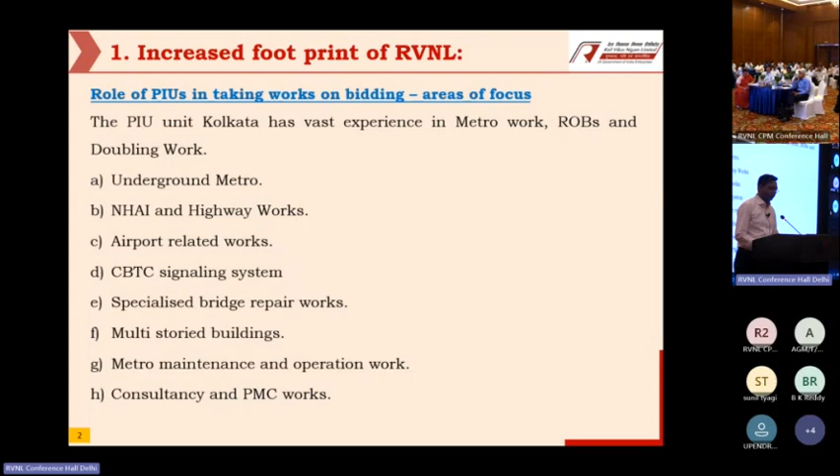Where we are right and where wrong, I'll deal with the subject through four projects that we started in the last one year. We started the Kona Expressway this financial year, where we are a contractor to NHAI. It's an EPC contract taken via very aggressive bidding. We got this project at 720 crores against 840 crores, and we have 2.5 years. I've covered it separately, so I'll skip this part right now. It's a very challenging beginning indeed.

Then from the Airport Authority of India, we got work worth 230 crores on nomination basis. It's very nice for RVNL because we'll be learning from the airport field and we're also getting a good margin here.

Similarly, for KOPT also, we have got this Bascule Bridge rehabilitation work, again on nomination basis. We have got a 100 crore rupee work, and once we complete it, it will be a very nice added potential, because very few players will have this kind of expertise in repairing a Bascule Bridge. And again, being on nomination basis, we get a good profit margin.

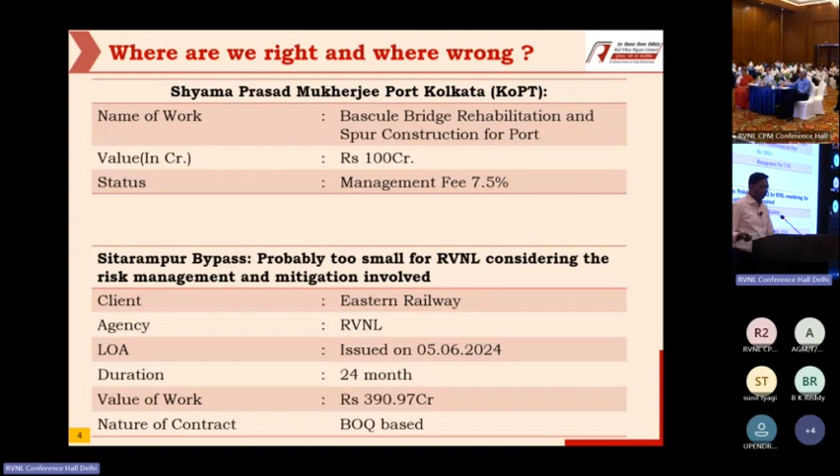Should RVNL not be a marquee organization then? Yes, it should be market facing.

It's a 720 crore work we started, but without deploying any additional manpower. Then we started the Sitarampur bypass, again without deploying any additional manpower. Then we started Kalipahari Pradhankunta, again without additional manpower. All the works we completed in the metro over the last year have been handed over to Metro Railway Kolkata, and that manpower has been redeployed to these works.

The best tool to perform, as we are changing our role from a client to a contractor, is that we need to be strong in legal and arbitration matters. That's why in the PIU we have established a legal and arbitration cell, because Kolkata itself is a very difficult place to work due to various litigations, which I'll explain in the underground section. If we don't have a dedicated legal and arbitration cell, many of our letters and legal matters may be left unreplied, which would have huge ramifications for us.

We intend to have a build, drawing and design cell also, because in Kona, since we are EPC contractors, design is our own scope. No matter what we outsource, we need to analyze or compare two designs, as I'll be discussing regarding Kona. So we need in-house designs and good designers who can help us bring this in. We have also established a planning cell.

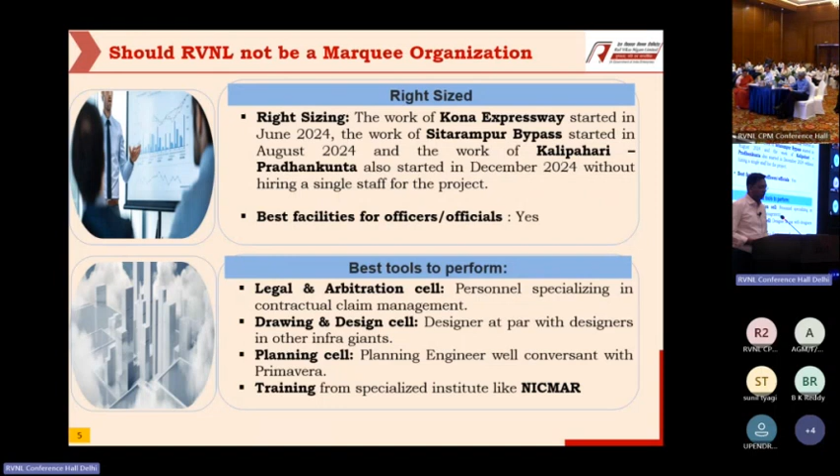We have hired a planning engineer who is an expert in Primavera, and we are using it. I'll show in Kona that we have been able to achieve something in Primavera because we are able to engage a planning approach. We should also go for training of our engineers from specialized institutes, from NICMAR.

This I'll skip because it's already in the Google sheet.

This is the data from my organization over the last 5 years. There were about 3 to 4 CPM. Units have also shrunk, and manpower has also decreased in the last 5 years. I think this is more important: the turnover in these 5 years has risen from 920 crores to 2700 crores. Our expenditure for PIU Kolkata is 2700 crores this year. So the turnover per employee is on a rising trend, which is healthy for the organization.

I'll skip this part, which is in the Google sheet. These case studies are good innovative works, but they are related to the underground, which I'll be covering separately.

The last one is we are doing this elevated metro, and in Kolkata getting a traffic block is very challenging given the political conditions. There are articles in Times of India about our Chingri Ghata problem, where the launcher is stuck just because we need to cross the road. We have made the diversion road, but there is no word from the state government as to when we will get the traffic block, so we are doing other works.

So whenever we are planning at the design stage, we try to think about how we can minimize our dependency on the state government and on traffic police. Normally we were doing the concourse by cast in situ. Till now we were getting the blocks, but considering the problems ahead, we have made a different design with TCPL, the Tandon Consultants, where the concourse would be done using precast beams and sacrificial shuttering, and the concourse can be cast there. This will reduce the amount of traffic block required and our dependency on the state government.

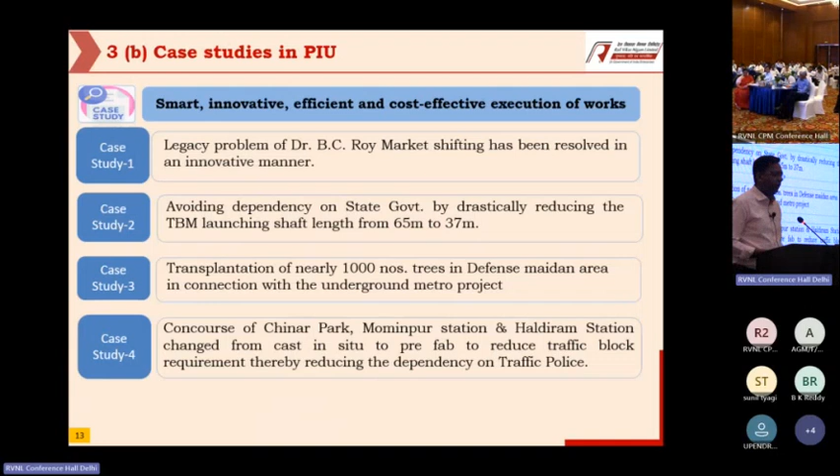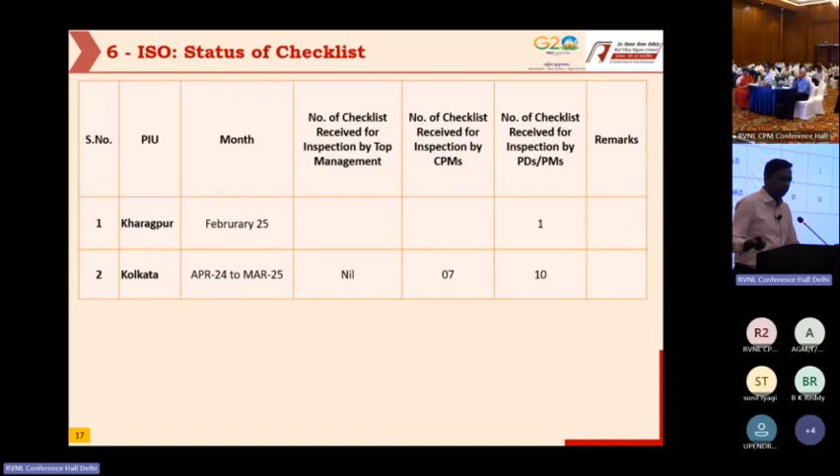These are there in the Google sheet. The ISO checklist is okay, we have done a lot of inspections. We are ISO certified on all three ISOs - 9001, 14001, 45001 - till 26.

One good initiative was that we cleared 242 crores of advances last year. Many of the advances that are appearing are frozen because those works have not been completed, and as the works get completed, we'll get those advances also.

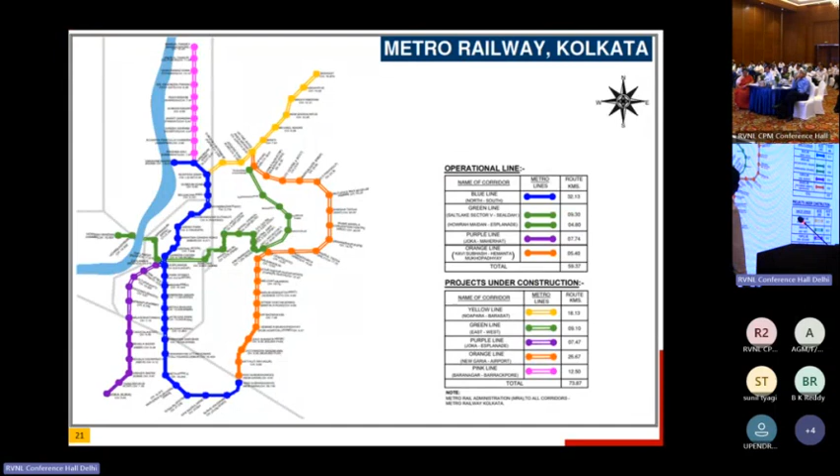So now I move to the main topic today, which is the challenges in the underground metro and Kona Expressway. First, I'll be dealing with the underground metro. We are doing the purple line here. This is the area that we are covering now with the underground, from Joka to Majerhat, which has already been commissioned.

This shows that from Joka to Majerhat, we have already commissioned in 2 phases, and both of them have been inaugurated by the Honorable Prime Minister of India. Phase 3 is in progress, and we expect to complete it by December 28.

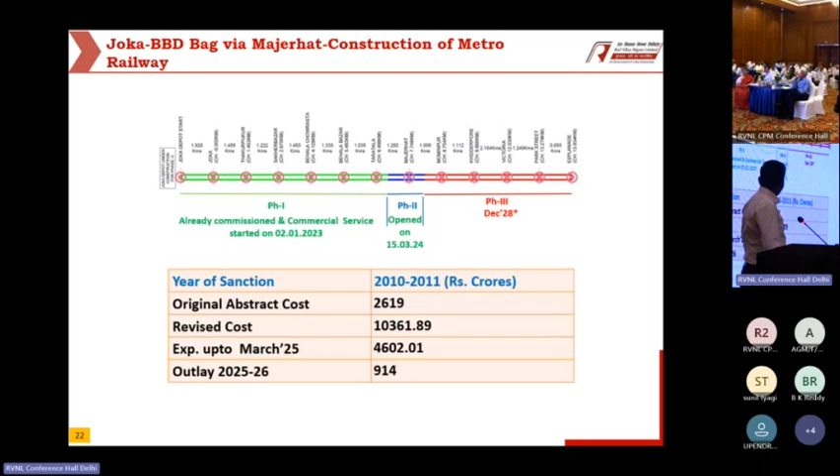In the underground, it's a 5-kilometer section. Our main contractor is L&T, and we have Yuksel Proje Humus JV as our general consultant. It's a 2,500 crore package started in 2023. The end date is 27 for the civil engineering work, so overall we are expecting to complete by 28.

The main scope of the work is to have 4 underground stations, namely Khidirpur, Victoria, Park Street, and Esplanade, and twin tunnels for the metro, about 2.6 into 2 - that's 5.3 kilometers of tunneling involved here.

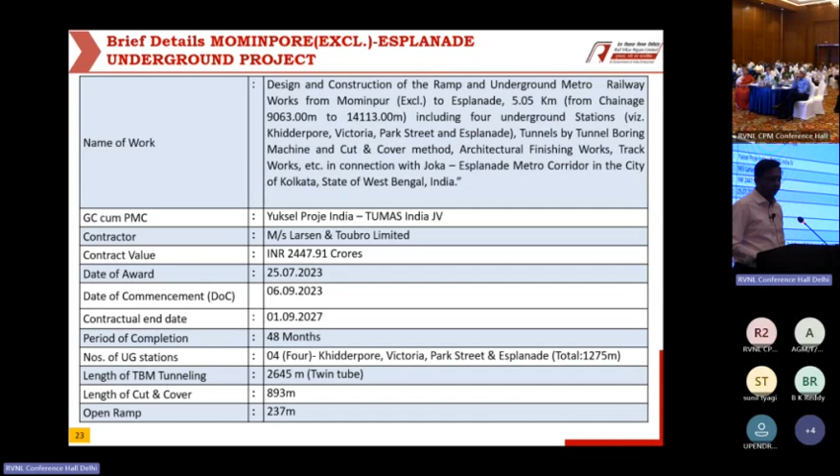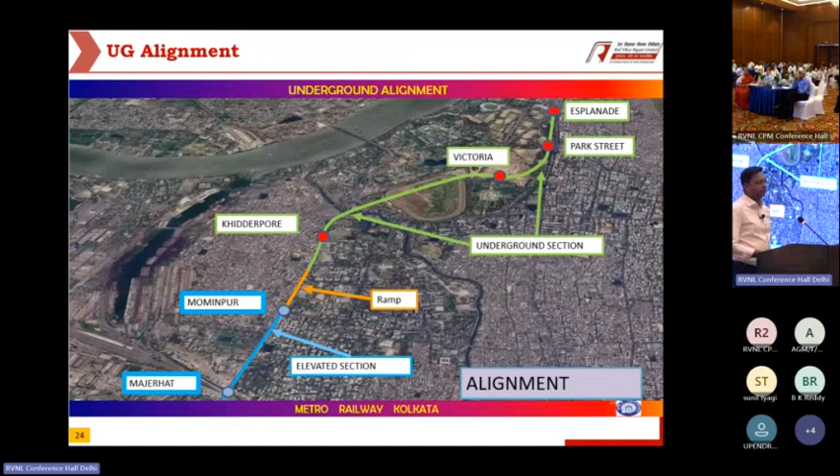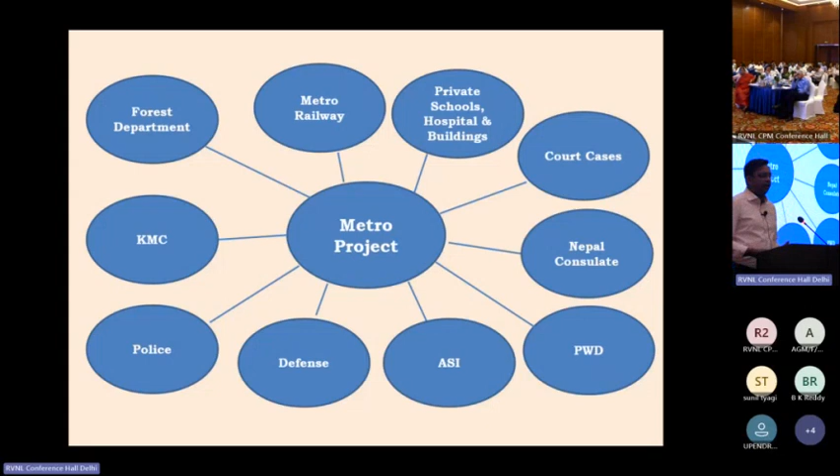All over India, except for Kolkata Metro, most of the metros are being done by the state governments only. But in Kolkata, the metro is being done by Indian Railways, and right now there is a bit of shortfall in cooperation from the state government.

We have a lot of problems with land acquisition, and we had problems with the CMRI hospital. The Consulate General of Nepal is involved, and the Kolkata Police land is involved. When we are taking land acquisition, it is done by the Metro Act, even though every land acquisition ultimately results in a court case. A court case itself takes about 2 to 3, 4 years of time, over which we have little control. The Consulate General may - I'll show you.

Now this court case has been settled. It took about 2 years of time, and they will be handing over the land to us probably about 6 months from now. Then there is the Consulate General of Nepal.

This land cannot be acquired by Metro Act, and it is very much essentially required. So a solution was arrived that we would acquire this part of land and then swap it with them. They have agreed, but when we acquired it, we have already paid 37.44 crores for the land.

As happens in Kolkata, when the owner has agreed, but there were 3 tenants, they have gone to court. First the case was disposed of in the lower court, but now they have gone to the divisional bench, and probably they'll go to the Supreme Court.

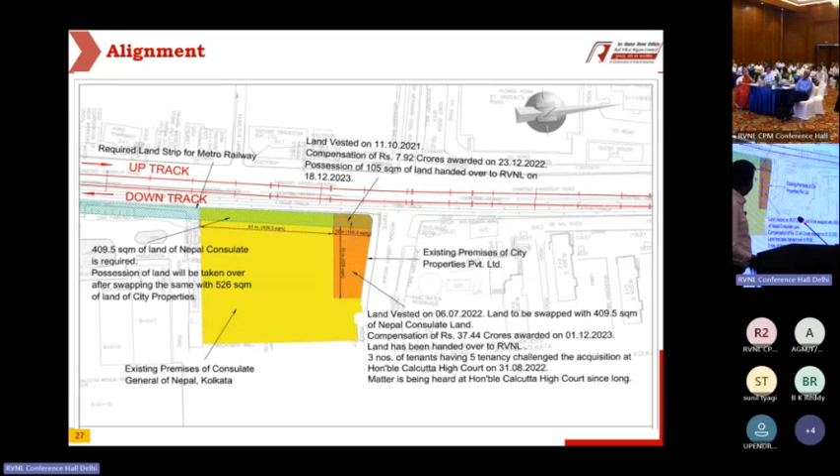Second is the Kolkata police land. This was discussed that we will require some land, and in turn we will modernize their assets. But now there is a strict no - they have simply denied, they are not even answering.

The issue is there in the PMG, and every month or two the PMG is held. The government is simply saying no, and there is no way we can move ahead without this land. Then there are environmental issues right in the heart of Calcutta.

About 1,000 fully grown trees are to be removed. Then there are heritage structures under which the TBM has to pass, so we have to address those. Then there are legacy issues between the Ministry of Defense and state government, and RVNL has to strike a very delicate balance between the state government and MOD without hurting either of them to find a solution.

In Calcutta, tunneling becomes a challenge. We have had the KMRCL Bow Bazaar incident - because of soft soil, high water table, and shallow overburden, these become challenges. There are also a lot of dilapidated buildings, so we have to be very careful to avoid any other kind of accident like Bow Bazaar.

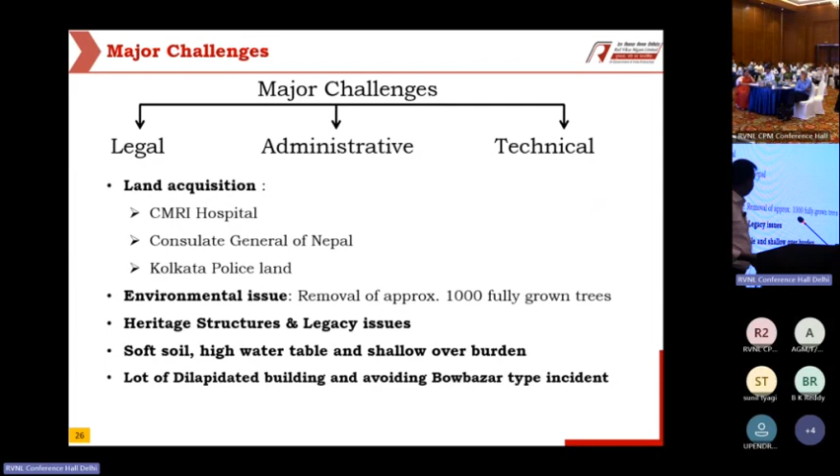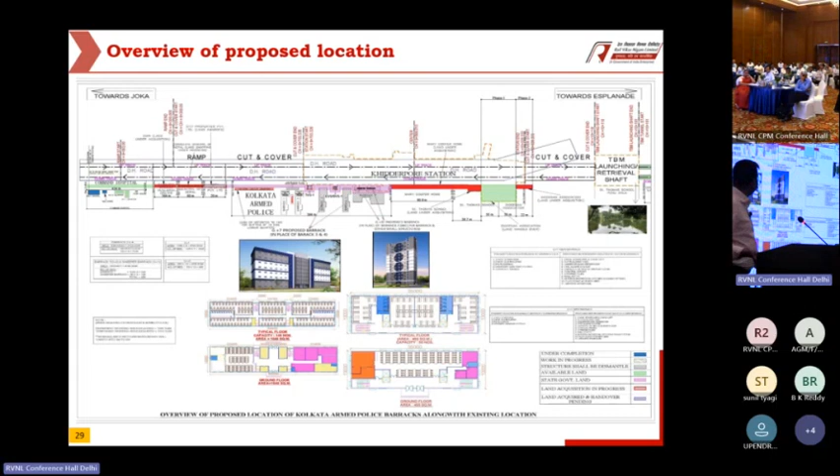We require just a small piece of land, only 800 square feet, from Kolkata police. They have dilapidated quarters, and we offered to build them G+12 and G+7 buildings. They were all happy, but at the last moment it has become political, so it's stuck right now.

The tree transplantation became a very big problem for us because NGOs went to court, and this ultimately went to the Supreme Court despite following all procedures. First there were 3 levels of clearances we had to obtain because all the trees are situated in the MOD area, called the Defense Maidan area.

We obtained clearance from the local military authority, from KMC, and from the Forest Department. Still, they went to the High Court. Finally, the case was disposed of at the High Court after 2.5 years.

Then they went to the Supreme Court, and this is where the importance of the legal cell came in. On the guidance of our ED sir, we hired Tushar Mehta - that was a very good move. Because of hiring him, the case was disposed of in just 2 hearings.

The Supreme Court guided us to the CEC. It took some time, but finally on 28th of March the CEC also gave us the final clearance. So these 6 levels of clearances we obtained by 28th of March.

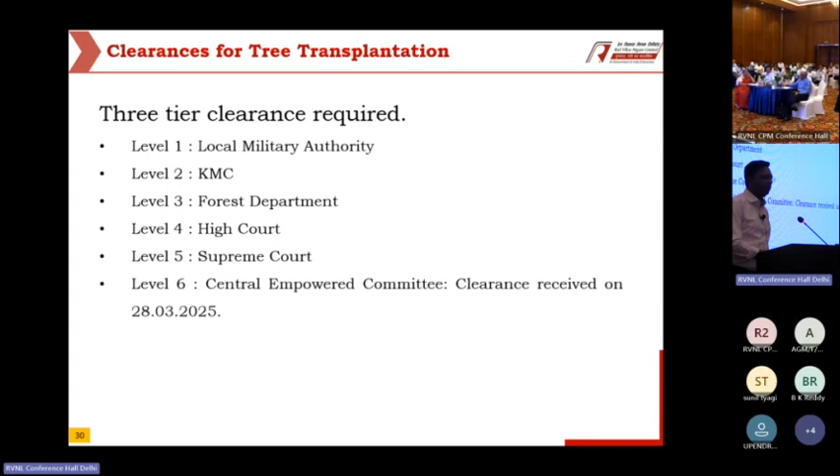I was aware that this would be a problem, so we had very well documented all the efforts we made in tree transplantation. This is a case where not a single tree is being felled in the strict sense - all 1,000 trees are being transplanted.

So we made a small video, and this video was presented in the Supreme Court also, which helped us get a favorable judgment in just 2 months' time. Can I show you, please?

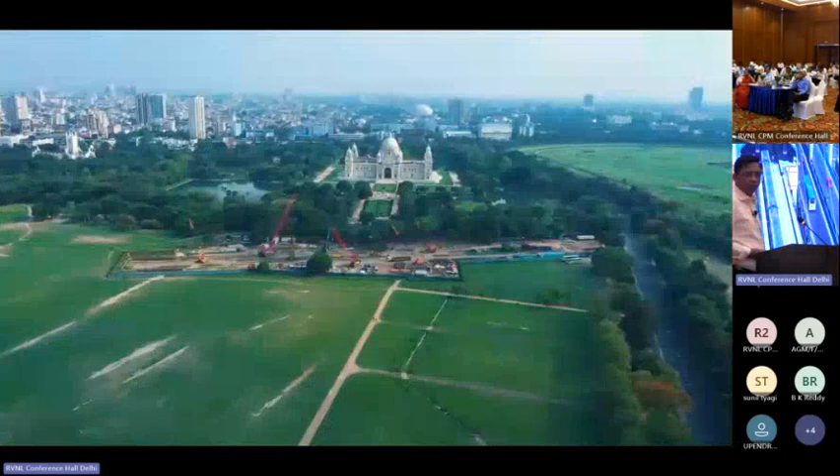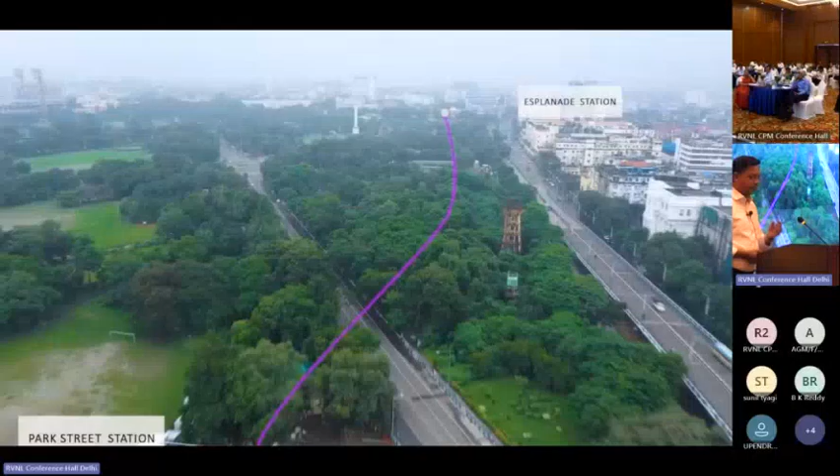In modern times, one of the challenges faced in planning infrastructural projects is maintaining a delicate balance between development and environment. The prestigious and technically complex project of Mominpur Esplanade Underground Metro in the great city of Kolkata also faced this challenge. There are approximately 1,000 trees in the alignment of the project.

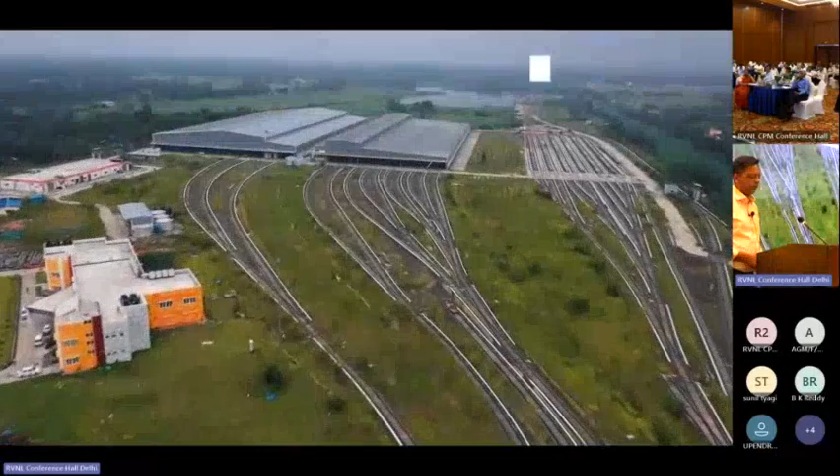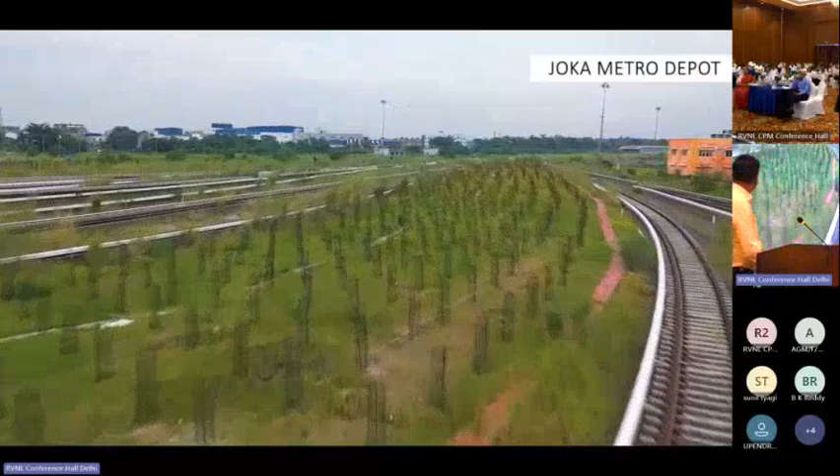In normal circumstances, trees are felled by doing compensatory plantation. But in this case, RVNL not only did 5 times compensatory plantation against each tree, but also transplanted each and every tree without cutting a single tree. You heard it right. All the trees in this project have been transplanted.

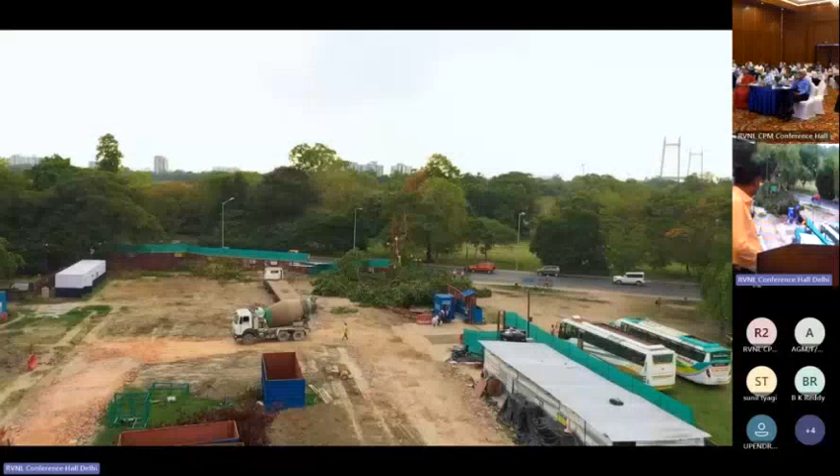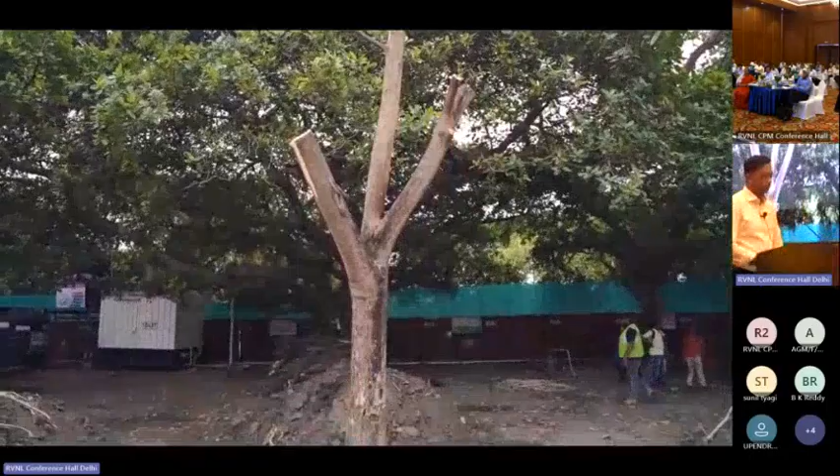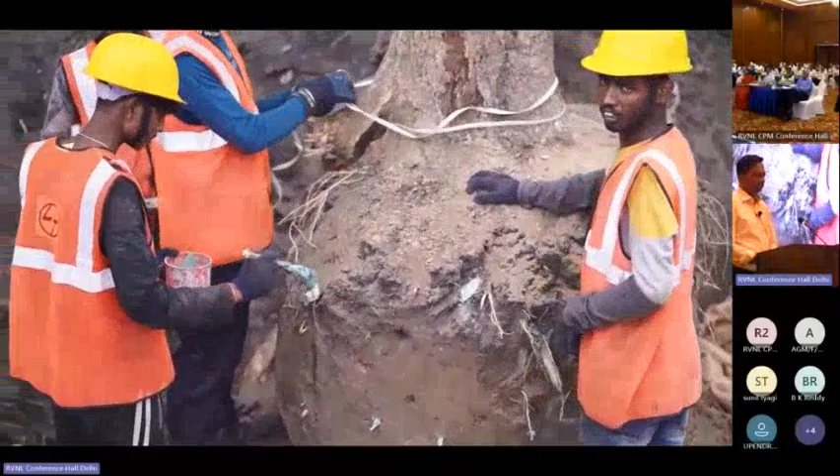RVNL and L&T collaborated and prepared a detailed method statement to execute this work of transplantation in a scientific manner under expert supervision. The big and heavy trees are first trimmed to make them lighter and transportation ready. Then the soil near the tree is excavated. The roots of the trees are treated with special chemicals to enable them to retain moisture and nutrients during the process of transplantation.

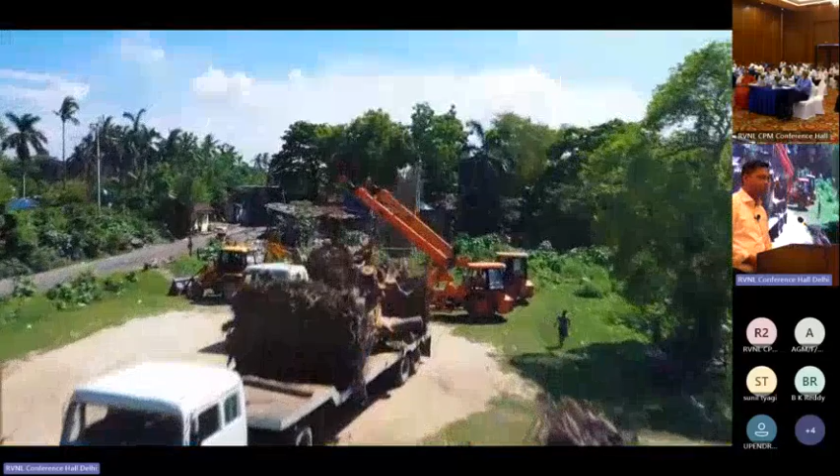The tree is then extracted from the ground using road crane and loaded on a trailer to transport it to its destination. At the location where transplantation is to be done, a JCB is required to excavate the ground and a hydra is required to unload it from the trailer and plant it back.

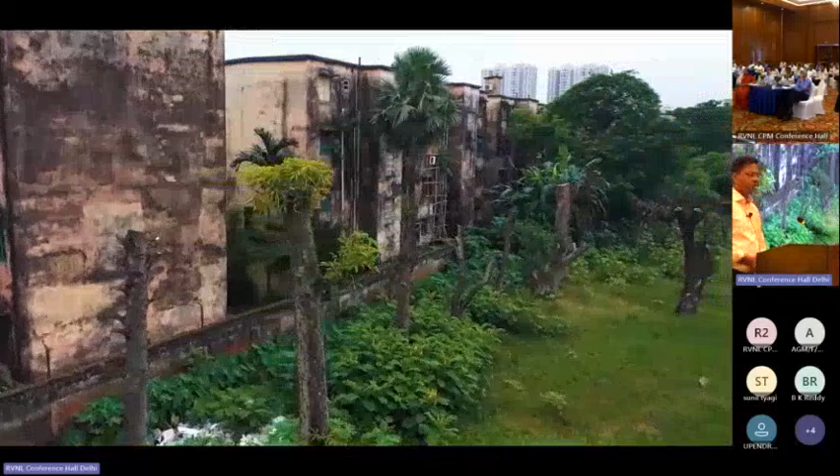The tree trunk may initially be supported using ropes from the ground till the tree is firmly rooted in the ground. With extra care for a few initial days after transplantation, the survival rate of transplanted trees can be increased. Committed to sustainable development, RVNL.

So the success rate now is about 60%. Now here we also had a learning when we interacted with CEC that we are trying to achieve say 100%. It's not possible because they explained to us that people don't understand transplantation. So even now when the CEC gave the order, it reversed the High Court order. The High Court order was go for 100% transplantation.

So then CEC with a batch of specialists, they distinguished the entire 1,000 trees into 2 parts. One are the native species and then the non-native species. For non-native species, CEC has simply given order of felling because they will not survive. So if you transplant those also, they will not survive and the percentage of survival reduces. So if you transplant only the native species and then if you take care of them, then the chances of survival are as good as 60 to 70%.

The Forest Department does not recognize legally transplantation. They give permission for felling. They don't have anything called transplantation. That's one thing. And secondly, in their own official figures, they accept a transplantation success rate as 35%. So if we are able to maintain anywhere like 60 to 70%, it would be a good achievement for us.

This, as I was talking about the legacy issue and one of the good works done, I would say this is the BC Roy market at Esplanade. And if we are to make an Esplanade station here underground, this market is to be shifted. Now, this is an unauthorized encroachment on the Ministry of Defence land. And this market was made in 1956. MOD has not been able to remove this market since 1956.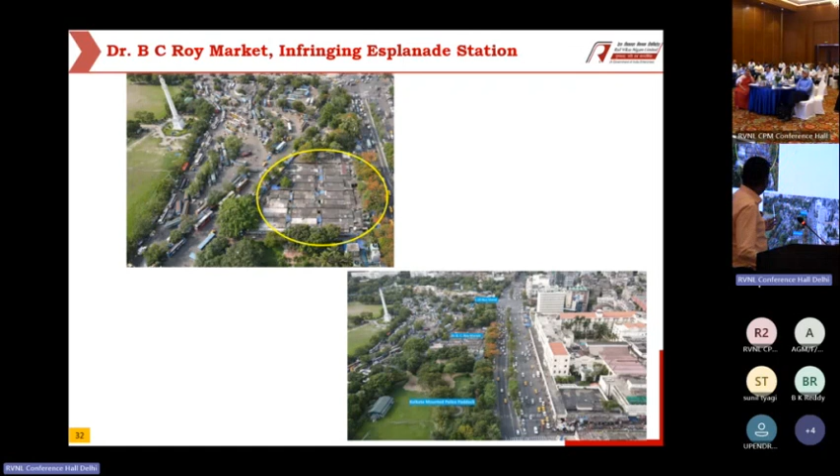So because of this, this issue was stuck for the last 11 or 12 years. There was no decision on this. We had gone to the extent that it was thought that Esplanade station would ultimately not be made and we would terminate the line 1 station ahead. So ultimately RVNL came up with a suggestion which was accepted by both MOD and state government. And the suggestion was this, that we have an existing BC Roy market.

So this is the Esplanade station, 300 meters in length. The BC Roy market is located right in the center. That's called the B area here. So we gave a solution that we will restore your status quo. There are 534 shops. We will make a 534-shop prefabricated market here in A. We will make the station in 2 phases.

In the first phase, we will shift the entire BC Roy market from B to A, and then we will construct this half of the station. And in the second phase, we will make the permanent BC Roy market here, bring back the market here, and then we will make the station here in A. So ultimately, the underground station would be made and the BC Roy market will remain status quo, on top of this station. It will remain as it is.

State government was very happy, and MOD finally, after a lot of reluctance, agreed. Because having worked in Bengal, I know that you cannot shift 534 shops. It's not going to happen. It's better to abandon your station. So then we have already started the work of construction of the temporary BC Roy market here.

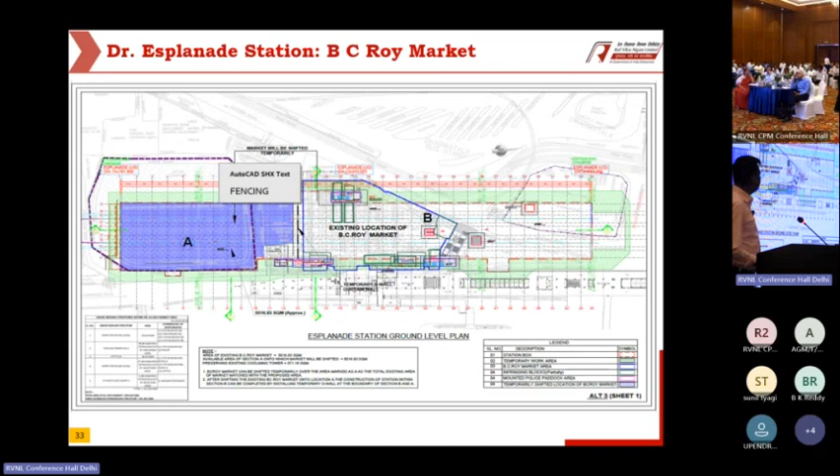And this tunnel is already made. So they asked us that you have to make a crossover anyhow. We don't know how you'll make a crossover. We told them that we are giving a crossover here. All the studies have shown that you don't require a crossover here. The line can be terminated here. But being the client, they said, no, we want a crossover here at any cost on this side. We will take the trains here.

Fine. Now the tunnel is already done. The TBM has done the tunnel. You cannot do the cut and cover method here. So ultimately, we gave them an option that if you want the crossover, we are going to do it like this. We are going to take it here and give you a crossover here. So when it was presented to the general manager Metro, he liked it.

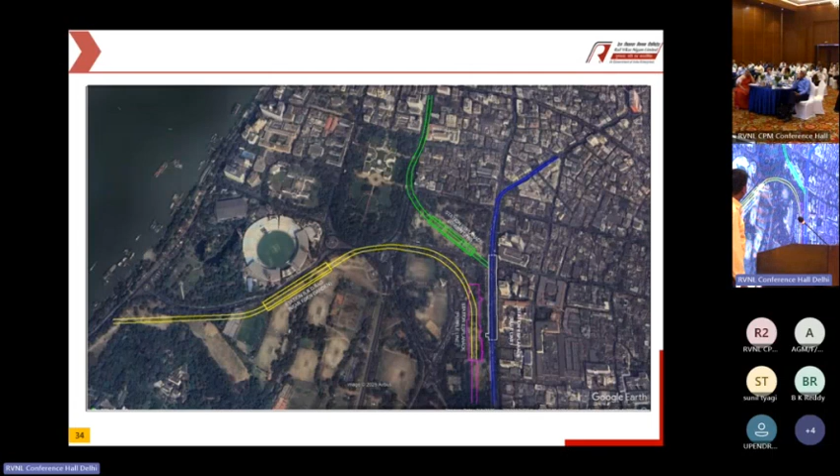So then we gave another option that now that you are taking it so far, why not give a station to Eden Garden? That's your choice, not us. RVNL is not saying it. So finally, GM Metro has agreed. They agreed, we did not. We just gave them a technical solution.

So they agreed, and this is the minutes of meeting of the general manager, where he has said that this BBD Bag, because the original work sanction was Joka to BBD Bag, and one station was supposed to be not made. So he said this BBD Bag station can be made here. So we are very clear. If Metro Railway gets it sanctioned and asks RVNL to make it, we'll be very happy to make it.

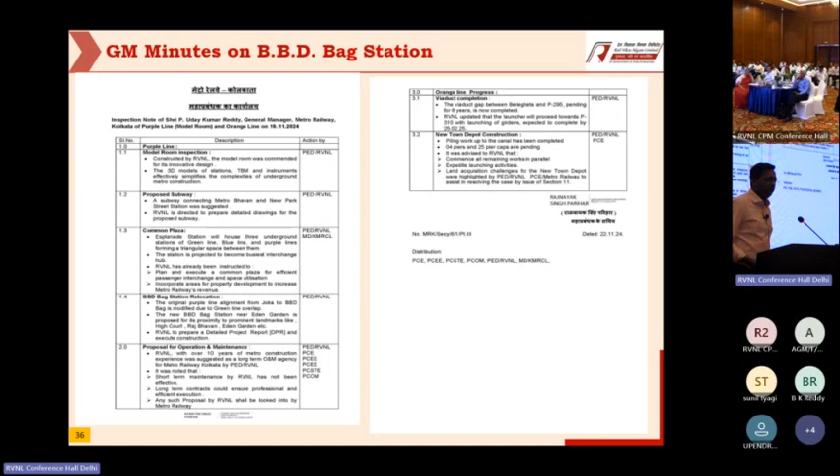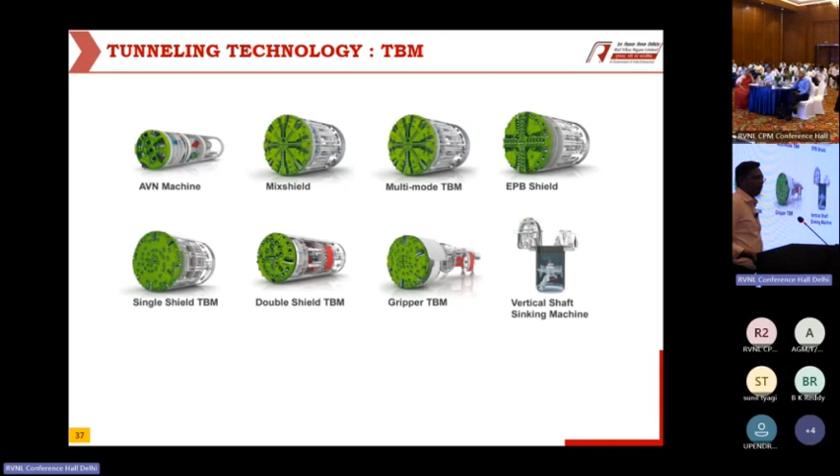We are doing the tunneling here with the TBMs. So considering the soft soil, here is the EPB, the earth pressure balancing machine, that we have selected. FAT has already been done for both the machines. In fact, sir, today the first consignment of the second machine has also come to Calcutta.

So one very important thing we need to do is whenever we are doing anything, we need to analyze what wrong has been done in the past, so we can be careful. One very important incident, the Bowbazar incident, happened in Calcutta in the KMRCL. There was a TBM machine going, and the first incident happened on 31st of August 2019. There was huge leakage of water and soil suddenly. There was no loss of life, but 23 buildings collapsed and required to be dismantled.

The second and third incidents were actually mainly because of one reason. In the Calcutta area, it's totally sandy and totally saturated. In the newspapers, it came that the TBM had hit an aquifer. Now, in Calcutta, there is totally sand and it is totally saturated. Wherever you go, there'll be water only. So it's a very, very challenging thing to hold the water during TBM work, because there is a very shallow overburden and there are very old dilapidated structures in Calcutta. If water ingress in the TBM starts, it is going to be very, very difficult.

So having learned from this, what was the main reason? Why it happened? When we got into the details, we interviewed the contractor who had done it and the operator who was there. There is something called the tail skin grease and there are tail brushes. There were 3 layers of tail brushes. When that incident happened, they had already changed their tail brushes twice because they were worn out, and they did not have a tail brush in spare. That was number one. Number two, the tail skin grease was not functional. Basically no tail skin grease was going on, and they had no way to measure it. So we have made certain rectifications in the TBM based on that.

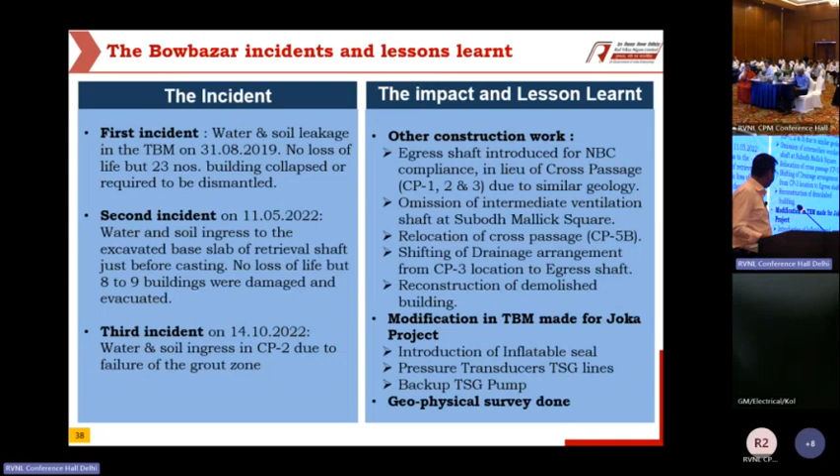Whenever there is a problem in any grease line, we would simply know, because if the grease consumption is normal, most of the problem would be taken care of. And then we have done the geophysical survey and we are keeping the backup TSG pump. That's the alignment of the TBM here.

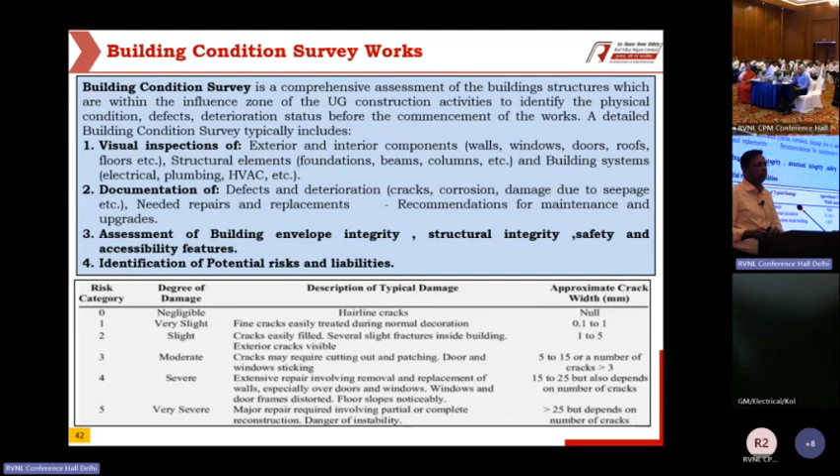Building condition survey and instrumentation is a very big challenge if you are doing the underground metro in busy areas like Calcutta because of the dilapidated state. Because we'll be moving close to very important archaeological structures, we have to do the building condition survey, which we have done, and accordingly, an instrumentation plan is prepared. In all these buildings, we have to install the instruments, and regular monitoring is to be done to see that they are not exceeding their design limits, the crack, etc.

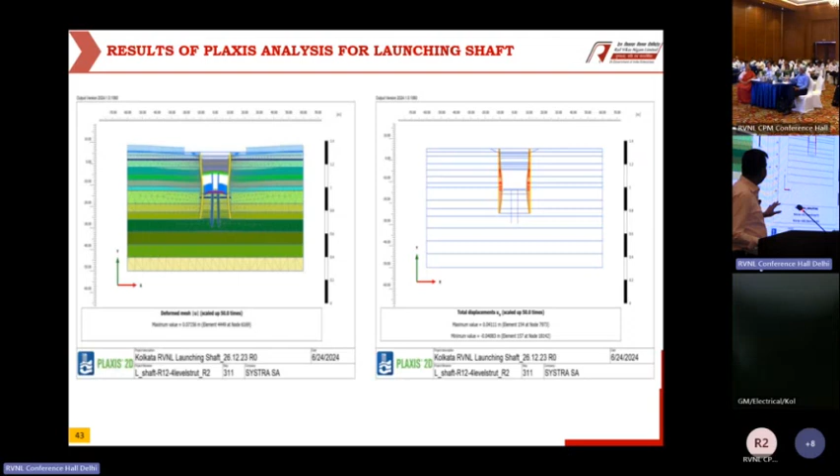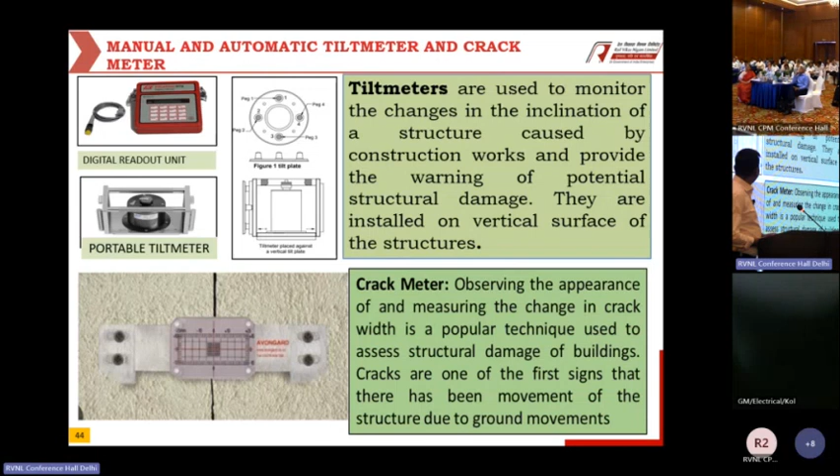The Plaxis software is the software that is used to first generate the settlement contours. Now, for example, that has been deleted. So the launching shaft map, anywhere where we are doing the TBM work, contours of settlement are plotted. Accordingly, these instruments are fitted in those buildings. The tilt meters, crack meters, the inclinometers, and then triple A values.

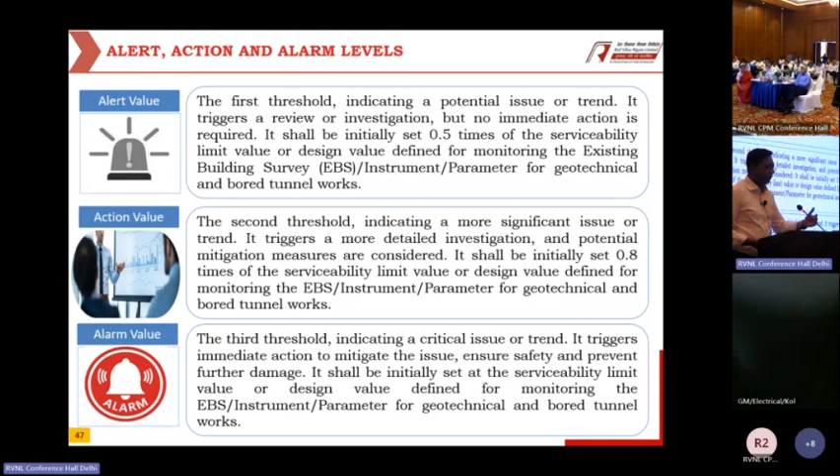These are called the triple A values. So when the design limit is there, we have the triple A, that is the alert, action, and alarm level. So based on this, the persons who are taking the readings compare with this, and then they take the action accordingly. Noise and vibration studies have already been done.

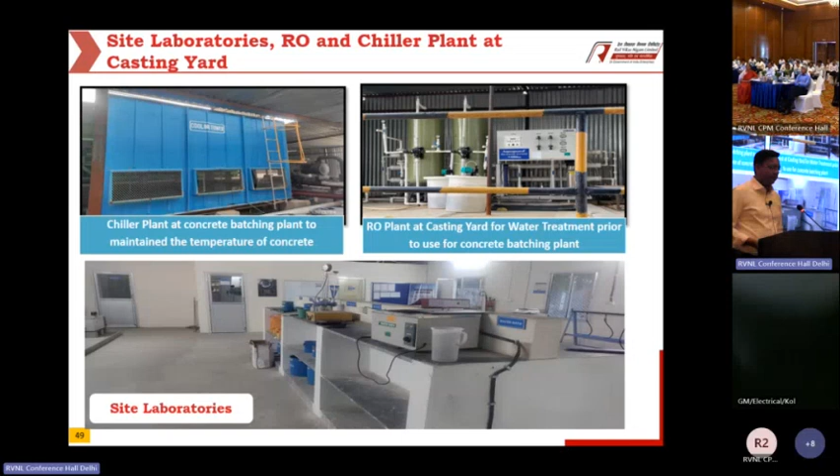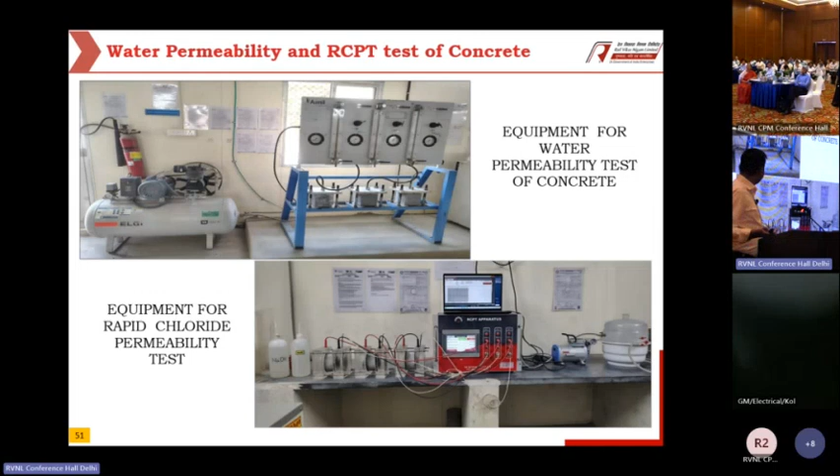These are the site laboratories and the chiller plant there. We are using the pre-cut and bend bars for the segments. This is the segment stacking. This is our laboratory with two things we have done. We are doing the water permeability test in-house, and of course from outside laboratories also. That's the RCPT test being done in-house.

So they are not removable. So the muck would be removed, as it starts, there will be a bucket. There are trains, a locomotive and the trains. They will bring it back, and using these trains, muck will be brought to the ground, sir. So they have this bucket arrangement. They will lower the loco. Yes, sir. Out of this 37, we are using only 11.5 meters. 24 meters is left for the reaction frame and keeping of the hopper; they'll use it.

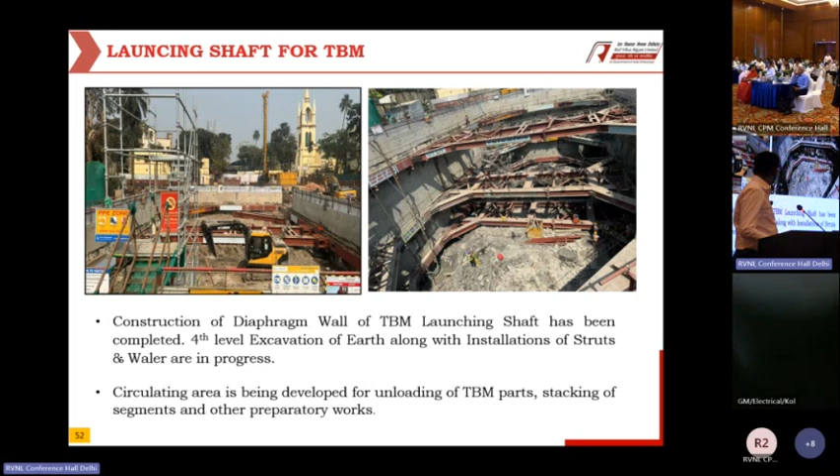We have made an underground model room. I'll just take you virtually. It's a 1-minute video, where we have displayed all the 3D models of the TBM and all the stations that are being made. This is in Calcutta, near Victoria Memorial.

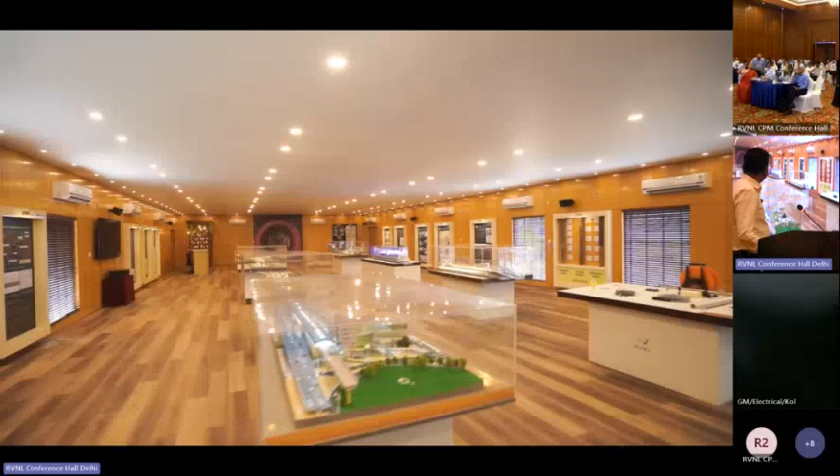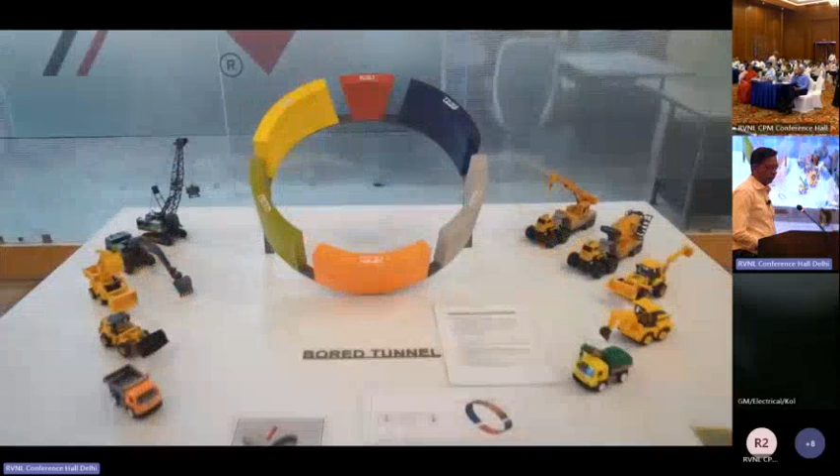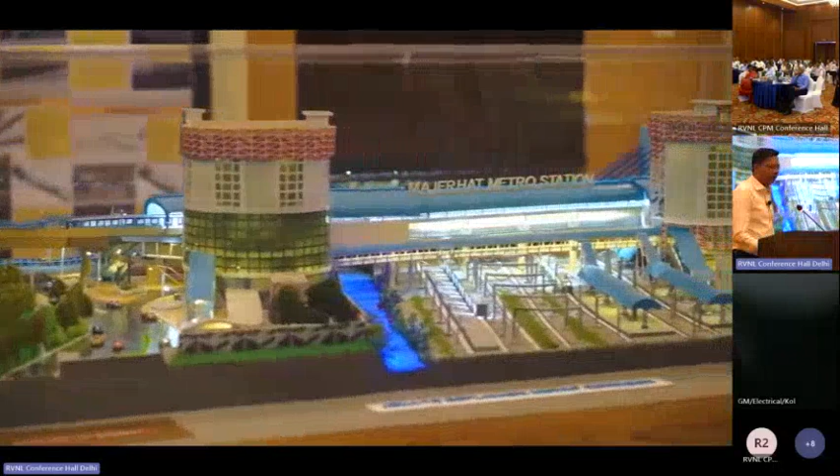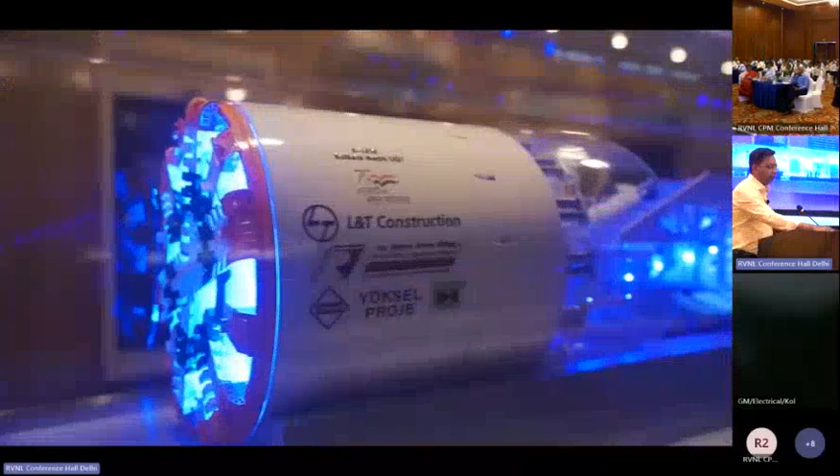That's the railway station overlooking the tracks. That is over the Maidan area. That's the Victoria Memorial. See on the walls. Soil samples, strata.

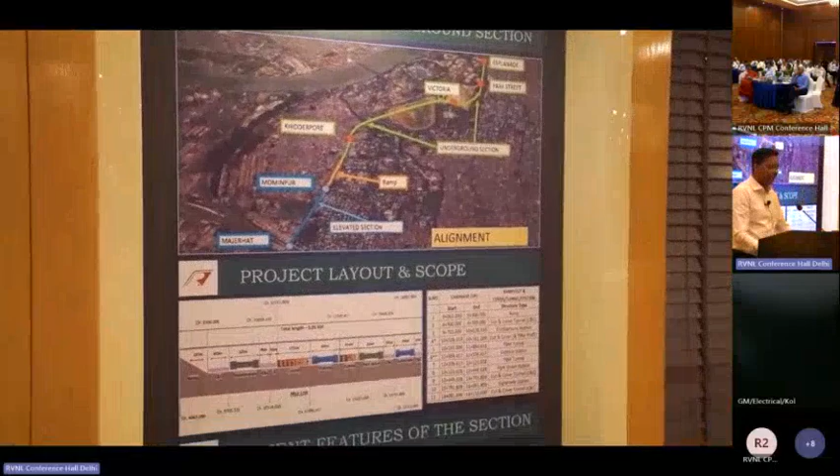This is world class. Thank you, sir. We saw one in Singapore, and I can say with absolute conviction, it is much, much better than that, much more informative. I think something like that we can have in Rishikesh.

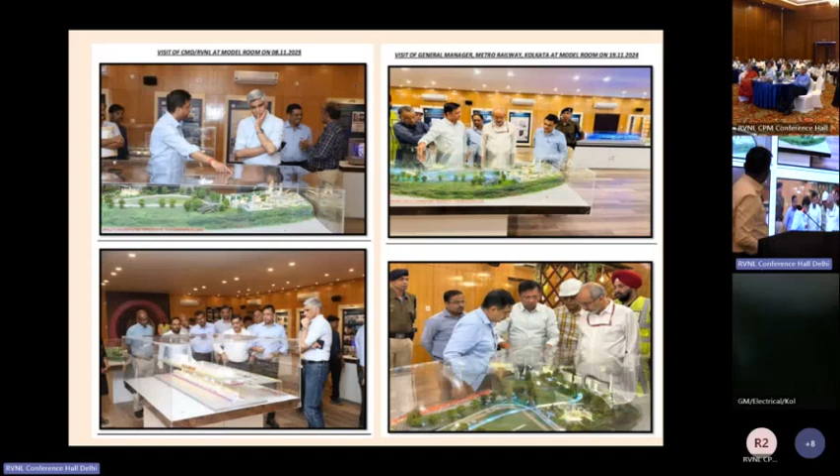We have a lot of dignitaries who come and visit it. This is our respected CMD, sir, General Manager, Metro Railway. That is our DO, sir. Then we have the media coverage here. This is the GOC Bengal area. We are at his mercy kind of a thing because we require a lot of help from MOD.

So we invited him to our model room, and when he came, he was so impressed. And probably it was after his visit, sir. This is the visit after which the PC Roy decision came. And he was so impressed by looking at RVNL's overall portfolio, because we were making Pamban Bridge and I had told about this Maldives project and Rishikesh project. So then he realized what kind of a company RVNL is.

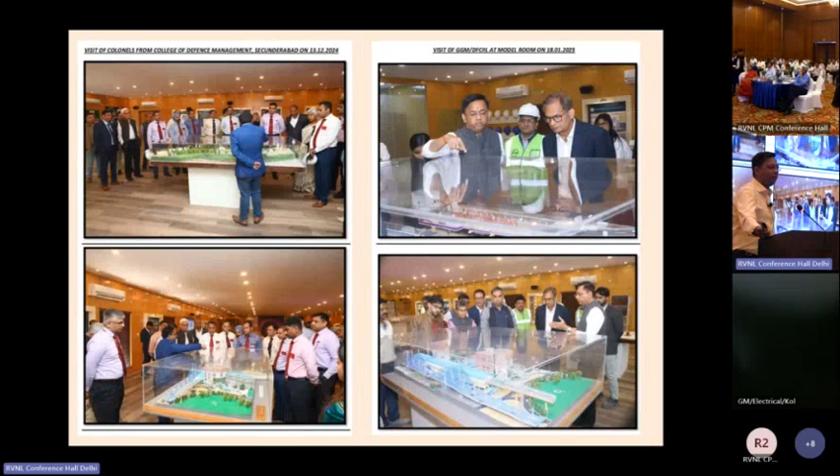And then he said that I'm going to send my batch of, this is a batch of 17 colonels. So in College of Defence Management, Secunderabad, the colonels who have completed a limit of service life and who are selected for higher responsibilities. So they're a batch of 17 colonels, and they're all tri-services. They were officers of Army, Navy, and Air Force.

So they had come and visited our site for one full day, sir. And we sent them to the Majerhat station, the launching shaft, etc. And they were really happy and appreciated RVNL's overall work, sir.

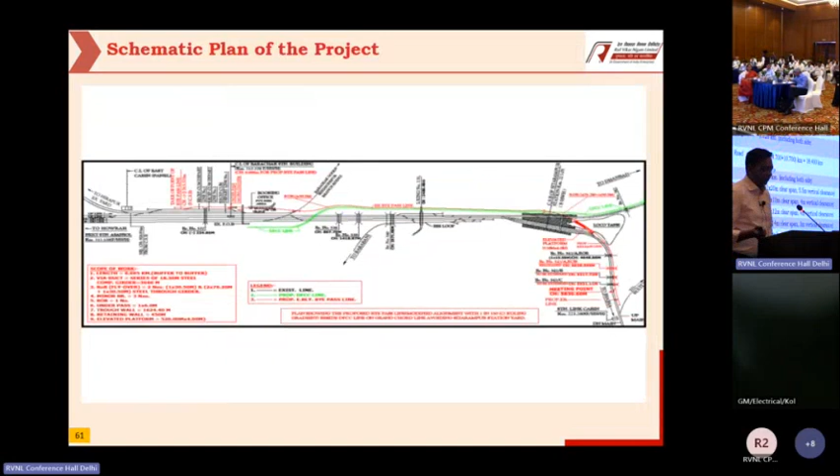Now I come to the Kona Expressway. Kona Expressway is one of the very challenging works we have. It was the first BD cell work in Kolkata PIU. As I said, the biggest challenge was that we took it at a very competitive rate. The assessed price was 840 crores by NHAI. We were L1 at 720 crores and L2 was L&T at 1045 crores.

So obviously the biggest challenge here is that we have to complete this work successfully, timely, and with some profit margin if possible, or at least at par. And in this contract, the dispute started right from day one because the LOA was issued on 31st March 23. The agreement was supposed to be signed. NHAI never presented the agreement because there were 594 encroachments. As per the contract, they are supposed to give us 90% land. They were in no position to give 90% of land. So they simply waited. And accordingly, RVNL, as per the contract, in September 23, terminated the contract from the contractor side.

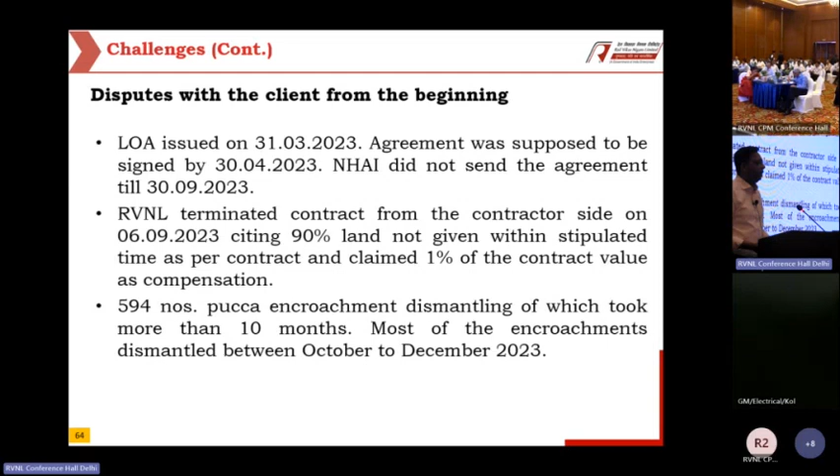But we are a PSU. Even though we had deposited the PBG, we were called by the chief secretary. And even though the state of West Bengal is in no way party, they are a party here. So they asked us that you should do it. And accordingly, meetings were held with Secretary MoRTH level also. And RVNL was practically pressurized to do this work. So we had to ultimately start this work.

Finally, when they gave us 96% of land on pen and paper and the appointed date was declared, a very strange thing happened. They handed over the land of Southeastern Railway to us. But when we went there to start the piling work, the Southeastern Railway people objected and said they have never given the land to NHAI. So that 96% land came back to 83%. Now this percentage is very important because you cannot declare the appointed date without 90%. So NHAI here is at material default.

And we said, now you have misrepresented. You have given us wrong information. So please refix the appointed date. It is not valid today. We gave them the letter in November 24, and till date, NHAI has not replied to that letter. But now we are also in a fix because we are fully mobilized to do full work. We started the work and we are doing it so fast.

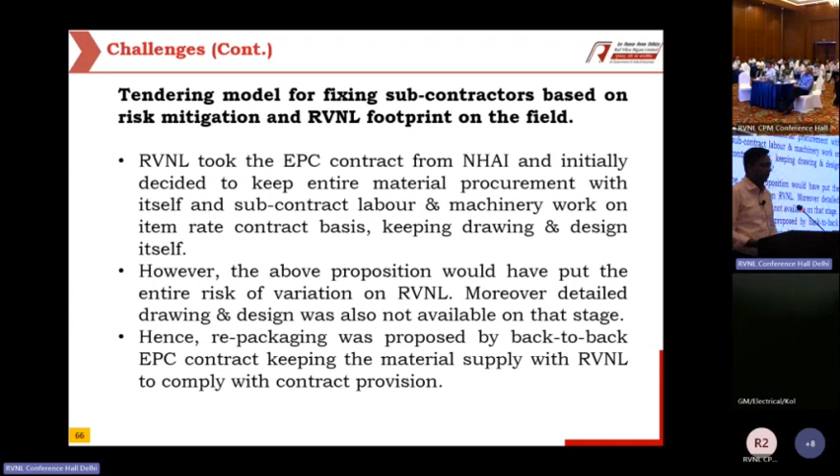Number one. Number two, the organization at that time, it was the first BD cell of the work. And because of this 1 year litigation, we thought we will never have to execute this work because we had already terminated the contract from our side. One fine day, the agreement gets signed. So immediately we have to prepare ourselves for executing this work. So the organization has to be prepared.

So from all those engineers and contractors who were in metro, only 4 or 5 people were taken. We started a very lean, thin organization for Kona Expressway, which is still executing the Kona Expressway work. But we ultimately got 6 more people from the PMC, because I will say safety is one of the areas where we cannot compromise. RVNL cannot compromise.

I'll share, this is a problem which everybody will face in some time to come. Initially, when we started Kona Expressway, our subcontractors, a renowned contractor, GPT, and the second one, RF, used to come to us every day saying the authority engineer is not helping, the authority engineer is creating this problem. So we said, now this is your problem. We have given a back-to-back contract. You go and manage the NHAI officials and the authority engineer. If something is required, we'll help.

Now they went 2 steps ahead. They managed them a bit too well. Because of which now they are doing anything and nobody is stopping them. So they have started doing 100 piles per month without taking safety precautions. Now neither the authority engineer is saying anything nor NHAI is saying anything.

Now the problem is, as railway officers, we cannot turn a blind eye, because if something happens, we are the main contractors. So now it has turned 180 degrees. Now we are the ones who are not accepting their RFIs. We are stopping their work. This will be a problem at some point of time. But I think we should keep our focus and our principles very clear. No compromise on safety. Safety is our requirement because we cannot have a blot on RVNL's name.

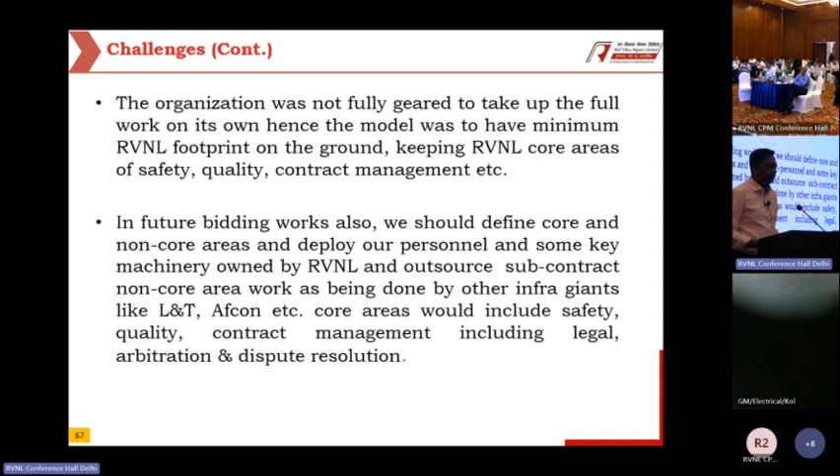So we need to define our core areas and non-core areas. In core areas, we need to have our manpower and certain key machinery, and still continue to outsource most of the work so that our footprint on the ground is limited, but at the same time, the core areas are with us. And core areas would mean safety, quality, contract management, including legal, arbitration and dispute resolution. These are the challenges that we are busy with. These are there in the metros also.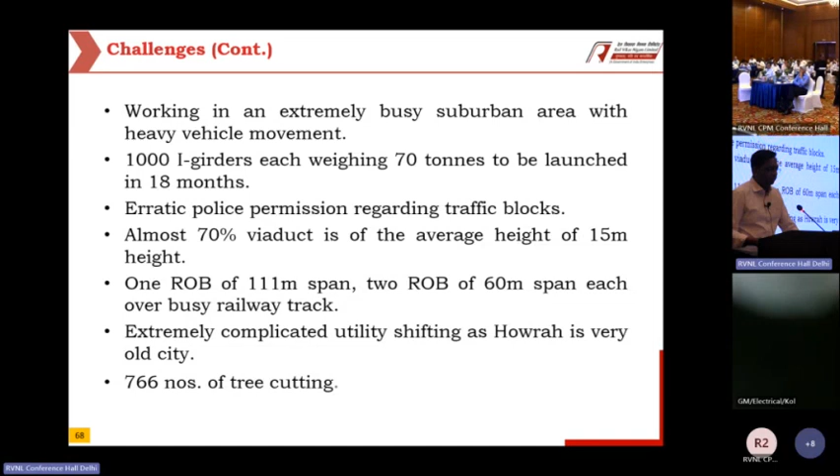So what is our action plan? First, build an organization, which we have already done now. Understand the client, the authority engineer in the system, and our small organization of about 5-6 engineers only. Now we really understand the NHAI very well, and our 4 bills have also been passed by them.

We have to focus. If we want to have some margin, minimize loss, then we have to get out of there as soon as we can. This is evident from our progress: we have completed 400 out of 1100 piles in the last 6 months, and we have completed 71 pile caps out of 221 pile caps in 4 months. This is the major work.

Basically, Kona Expressway is a 7-kilometer long metro kind of thing, a 6-lane viaduct. If we complete this, we are done with that. And as a result, we have achieved the first milestone 24 days before the scheduled time.

We need to be aware of the clients' and the contractors' both rights and responsibilities. We need to be aware of our strength and weakness, and at the same time aware of the client's strength and weakness also. It's an EPC contract, we cannot say no to everything. We will have to continue our work, but at the same time be very mindful as to whether it is within our scope of work or is it outside.

And if it is outside, we must process for COS. In NHAI terms, it is called the change of scope of engagement. Whether they accept it or not, we must keep submitting it. They will accept something, they will deny something. Whatever they deny can be taken to DRB, but we must do it timely and rightfully.

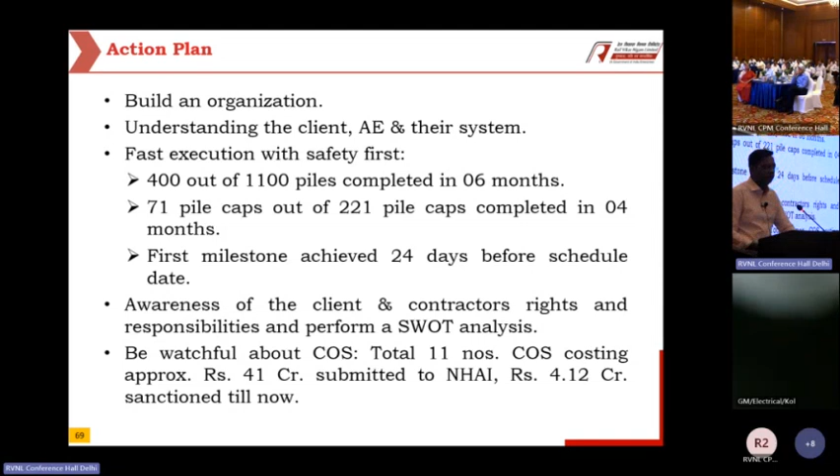So for example, we have submitted till now 11 COS, worth 41 crores, and we have already got 4 crores. And we'll submit it to DRB. Suppose out of 41 crores we get 20 crores, it's a big amount for us, for this management. And yet we are still to do the remaining 70% of the work.

Generating rightful claims - we are not a litigant party, but we must be aware of generating rightful claims, and we must prepare for dispute resolution right from day one. After completing half the work, we cannot ask for our rights. So it must be on record, it must be submitted to the authority engineer, it must be submitted to the dispute resolution board very, very timely.

So this I've already explained. And now we need to have the legal cell. In our legal cell we are having only 2 people, but we are now contacting people from Delhi, Kolkata, etc., who are experts in claim management. So we will take their services while submitting our claims to the NHAI.

This is how we monitor the financial and physical progress also - what is amount of work done, what is the bill raised, and how much is the payment received from NHAI, and whatever is the difference. We have to keep account every week kind of a thing, so that we are fully updated.

We need to use artificial intelligence really. If I have to talk about underground metro also, a lot of research is going on in tunneling - L&T and especially Herrenknecht are doing it, because with the Telangana incident, they say there are always 8 to 10 people in the ring building area.

With the concept of dark factories coming in China, the concept is, why do we need to have even one person at the ring building area? Why not totally automate it? Why not totally go for robotics? And probably we'll have it very soon.

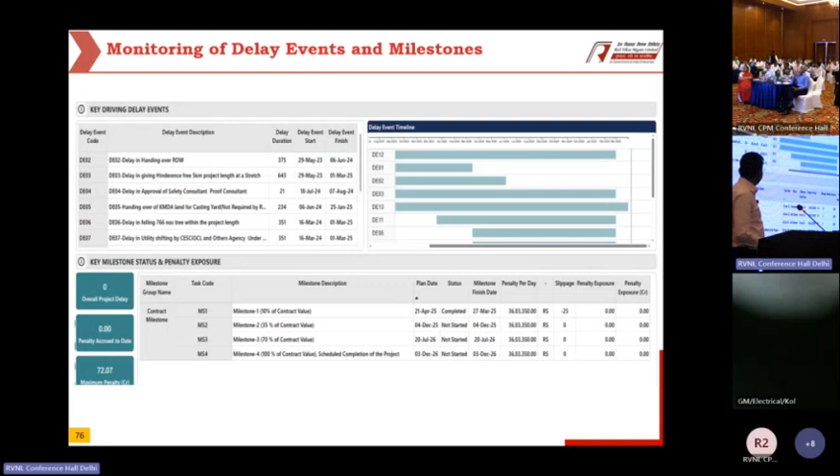Now this is the S curve, it is there in the Primavera also, it has been shown in the Primavera also. I'll highlight one more thing. For example, it shows here the plan on 6th of April - the plan by the KPI is 464. Here, what is the KPI? KPI is taken as pile. So the key performance indicators can be deck slab, girder casting, pile cap, etc. You can click on any one - suppose I have chosen pile.

So pile net is showing that you had planned 464, but you have achieved 398. Now this is again an error being highlighted to Primavera, because on 31st of March, we were 6 piles ahead. Now the moment 1st of April happens, what this program does is, suppose you have planned 72 piles in the month of April, it takes the entire 72 on the first day itself. So this is not correct. If we have planned 72, then I have suggested that you distribute 72 divided by 30 days.

So now what is happening is that even though I am ahead of my schedule, in the dashboard it is shown that I am behind schedule. So these are various inputs that we have given to Primavera - hopefully they will implement them and then we will be able to make it better.

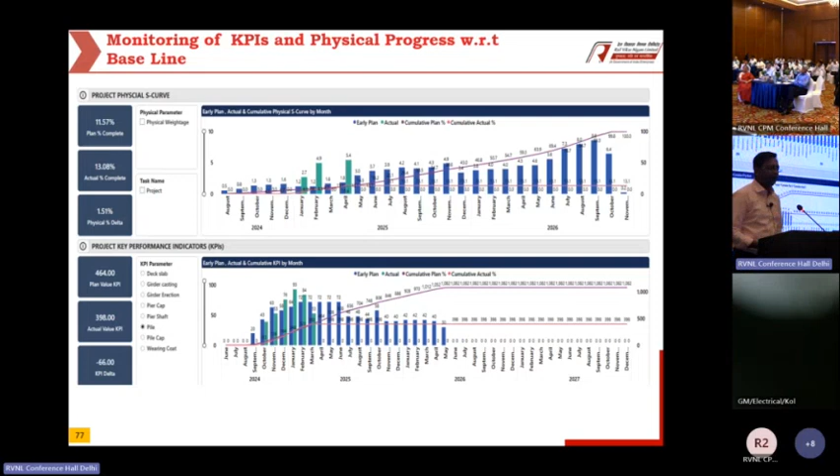Excellent presentation. So was a whole lot. Thank you, sir.